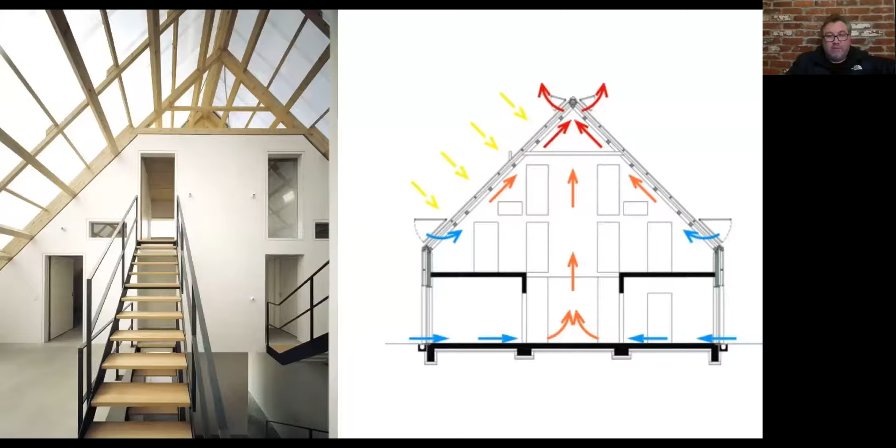Where does it make sense? Where does it not make sense? This was really early in our explorations on mass timber, so there are things in this that I definitely would not do today. But at the time, here on the West Coast, there weren't many people trying to do things like this. And so we were really trying to foment this discussion, not just hoping that we would get a project in Italy, but also locally.

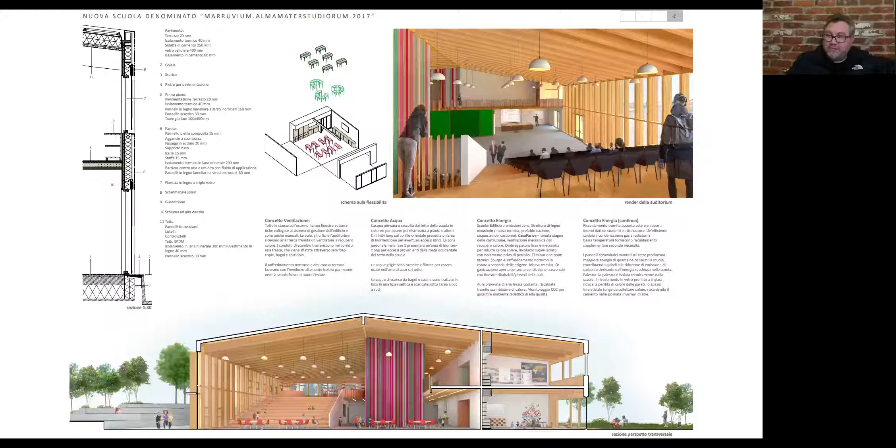We've been trying to push prefabrication, passive house, mass timber for quite a number of years. We unfortunately did not place in this competition, but it opened up a wider realm of mass timber for us.

Continuing on to a couple of speculative projects that we've undertaken. This is a 6-story building in a commercial district in Seattle. Really simple framework, CLT floors, a super high performance facade, and coming up with these really compact templates that we could potentially use on other projects. We've since taken this concept, and the 5,000 square meter primary school that we're working on is similar to this, but it's only 2 stories.

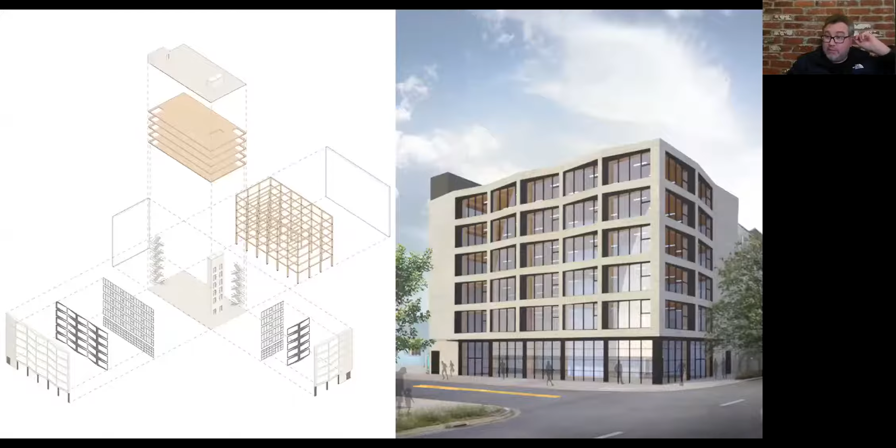And then the year before I moved to Germany, like I said, I got an opportunity to work in Brettstapel again. So this is the boards that are all ganged together in a row. There wasn't an American firm that was doing this. There was a firm in British Columbia, Canada, which, if you know Vorarlberg, British Columbia has become the North American version of Vorarlberg.

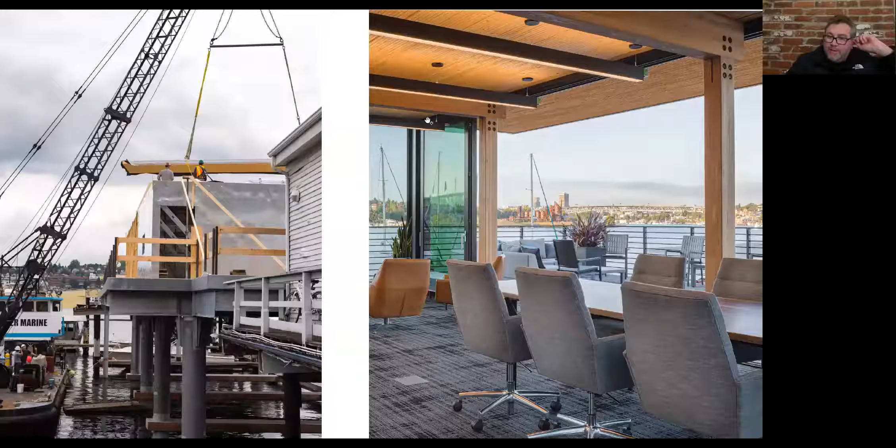There are a number of mass timber fabricators, manufacturers. We can get CLT now. We can get really nice glulam stock, really good, really elegant dowel laminated timber panels as well, like this one. And so there was a marina. This is an office over a lake that burned down a couple of years ago, and the client was basically told by the city that they needed to replace it as soon as possible.

So we built this huge steel and concrete platform that you can see right here, but we wanted to do something a little bit different for the roof. And we actually looked at doing cross-laminated timber panels. We have these overhangs, and the CLT actually performed better on the overhangs. But at the time, there was really only one CLT manufacturer in North America on the West Coast, and they were extremely busy. So the price was really high and the lead time was really long.

We talked to this firm that was making the dowel laminated timber panels, StructureCraft, who are doing really amazing, innovative work. They're big fans of Grasshopper and Rhino, and using all of these processes to optimize not just the way that they're fabricating things, but also the way that they're designing, and it's super elegant. So they worked with us. Again, it's over the water.

The only way to install these panels, which were about 3 meters wide by, let's say, 15, 16 meters long, was to load them up on a barge that had a crane, pick them up off the barge from the water, and put them on the building. So it was a little bit of a disconcerting experience. It was really everybody's first time doing anything like this, but it went together super fast. We got the roof on in a day.

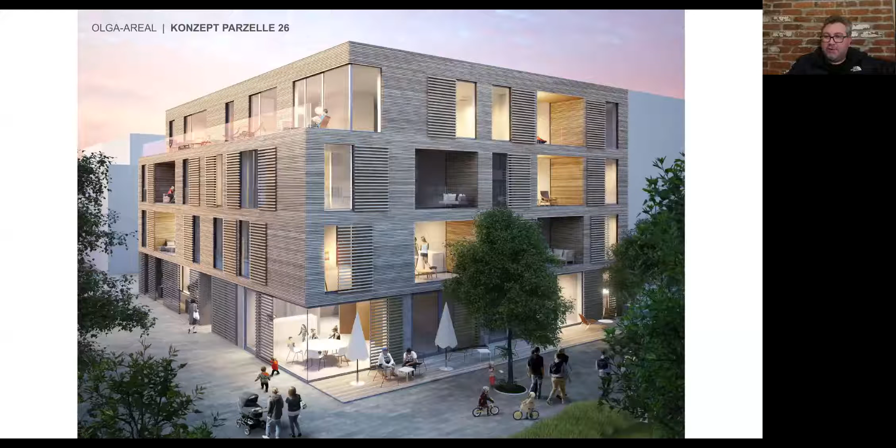It's modern, it's clean. The windows are all kind of similar size, right? So I think it looks good as an architect, and then it's also, I think, simpler to do as a passive house as well. And so a little bit of background on this project.

It's 11 homes. 2 of them are barrier-free. The units range quite a bit in size, from 61 to 115 square meters. So I believe it's 1 bedrooms all the way up to 4. It doesn't have a ton of community space, but it has a little bit. There's a small courtyard in the rear. And then there's a community space by the entry, and it has a little kitchen, kind of a coffee counter, essentially.

The wood fabricator for the project was Holzius. They're based in Germany. They have this really interesting mass timber product, a little bit like dowel laminated timber, but with big solid members that are kind of ganged together. And they don't use glues, they don't use metal in the individual panels; they use metal screws when they fasten them together. And it has a really wonderful aesthetic.

So the mass timber elements in the project, like I said, there's the floors. It's the HBV, the Holzbeton Verbund, the concrete wood hybrid. And we've seen that in a lot of projects. We're doing a lot of things in that nature here as well. The concrete is really more for dampening the sound than anything else. And then it's also in the walls. So the walls have this wood material as well, with exterior insulation beyond that.

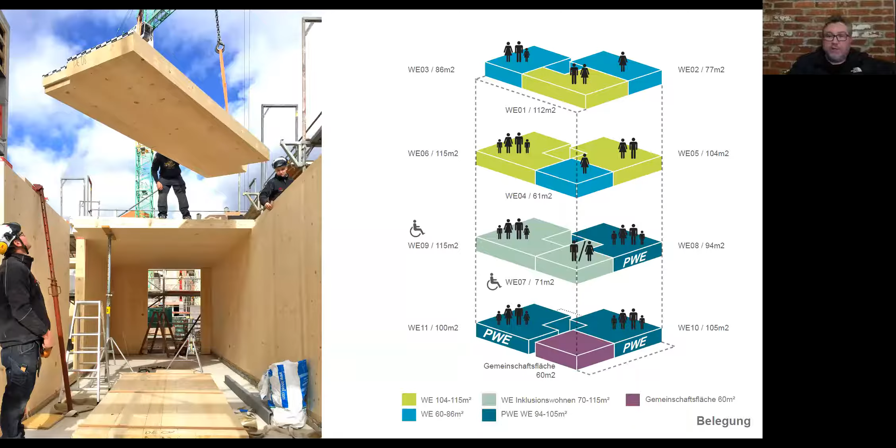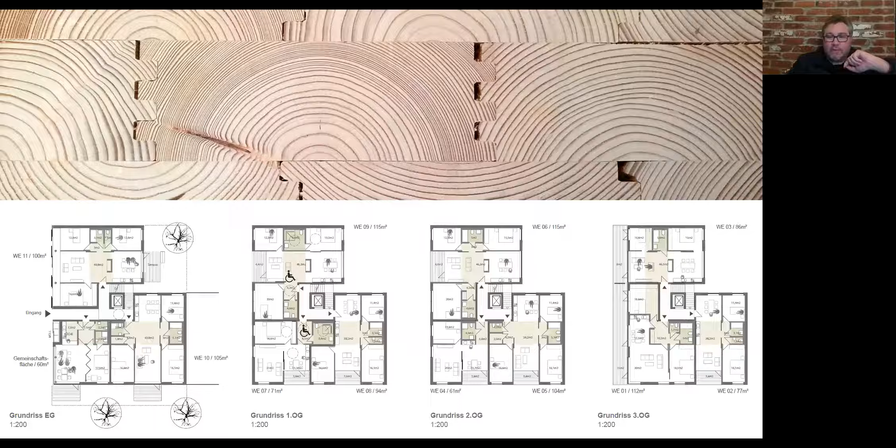So we'll move on to another project, Dreiecksgrün. This is in Berlin by Roedig Schop architects, who have done a number of really stunning mass timber projects. They've also done a number of really amazing Baugruppen. And so some of you are probably quite familiar with some of their projects. Also on it were Atelier PK and Rozynski Sturm, who also have some really, really elegant projects.

I love this building. It blends in well with the surroundings, I think. I love it because it's also on a quieter street. In most American cities, you can't build large buildings like this on a quiet street. They're usually on very loud and busy arterials or highways. And I also like the breadth of the building, right? So all of our lots in the US tend to be very narrow, and this is a very wide lot, and I think it allows for some very generously proportioned units as well.

All of the ground floor units on this are maisonettes. I don't know any other term for it other than maisonettes, but they're basically 2-story units within the building. So all of these have the living area on the ground floor, and then generally bedrooms up above. 13 units, 7 of them are flats. They're on the upper floors, the 6 maisonettes, like I said, that has a community roof deck. Actually, this one does not have a guest suite. And it has a very large shared courtyard. All of the units on the front side open up to the street. And on the back side, they have deeper balconies for private exterior space as well.

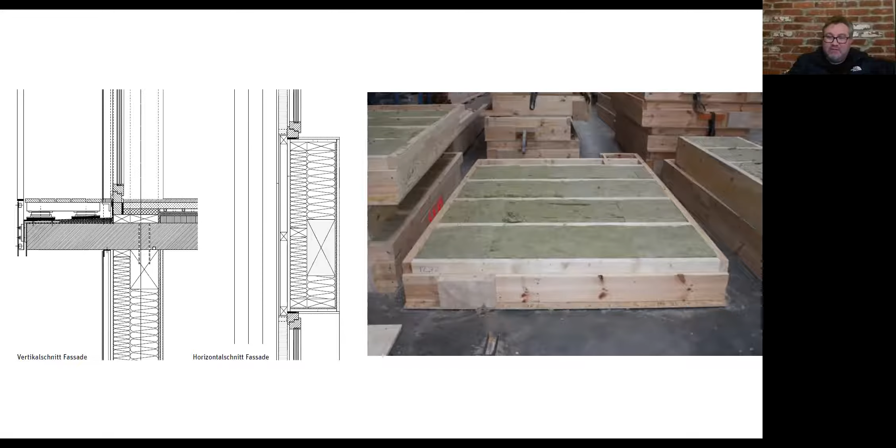From a passive house standpoint, I look at this detail and I kind of cringe a little bit. The CLT panels on the floor actually protrude out into the exterior environment. So there's a little bit of a thermal bridge here. It's wood, so it's better than concrete, but it's not ideal from a passive house standpoint. And I wanted to show this because this is a big issue for us on a number of projects where people want to keep the mass timber floor continuous through the external envelope.

And it's really difficult to have that conversation where we convince them that it may look great, it may perform fine over time, but if we're trying to achieve something as efficient as passive house, it's definitely not ideal. And also wrapping it with insulation also isn't necessarily ideal. Our solution is generally to go with thermal break and then have columns, and the structure for the balcony is kind of all vertically carried on the exterior.

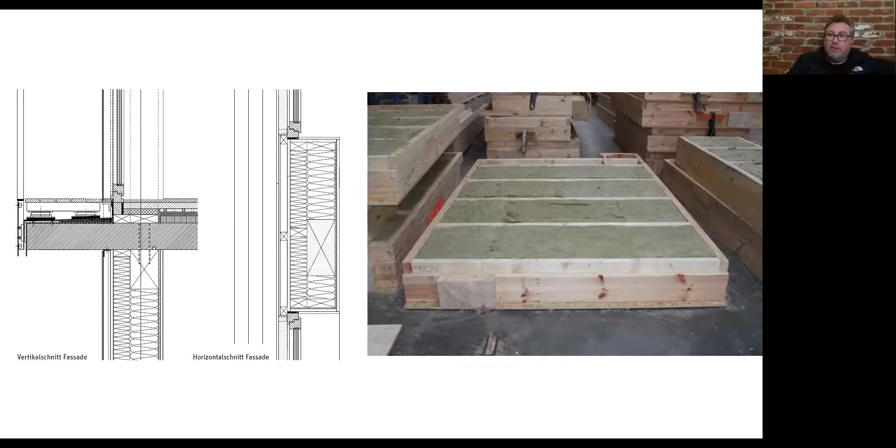Again, picture of the building under construction. You can start to see the wood columns and beams kind of forming the structure of this. Again, here's the concrete core for the circulation, and they're starting to install the panels. The section, this is kind of a classic. I love all of the Berlin Grundriss buildings. 22 meters to the Traufe, and then you've got your 45-degree Dachwinkel roof angle that it springs off of. It's very, very common.

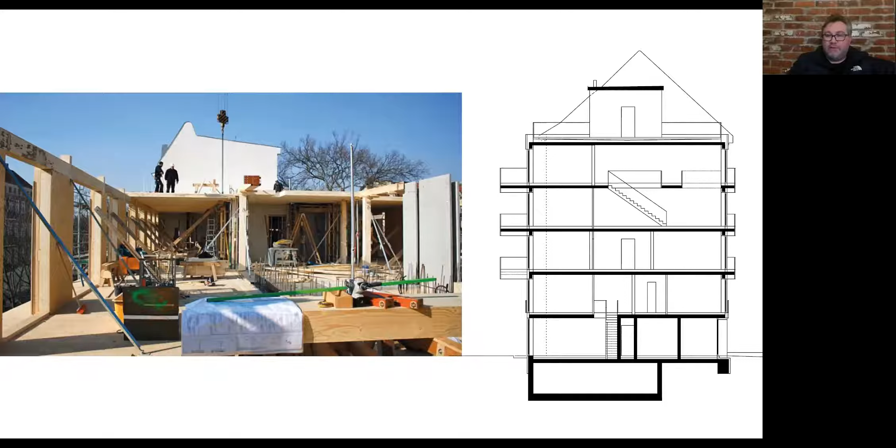Just run through the floor plans real quick. So coming in off of the street, there's a couple of units that have access off of the street, their own front door. This is the common entrance. It's kind of a little community space with a restroom, and then it has two means of egress going up to the top floor. So like I said, all of the units on the ground floor and the first floor are maisonettes. So this is the upper floor for this unit, and so on. From floors 2 through 4, these are all stacked flats. I believe they're all accessible as well, barrier-free.

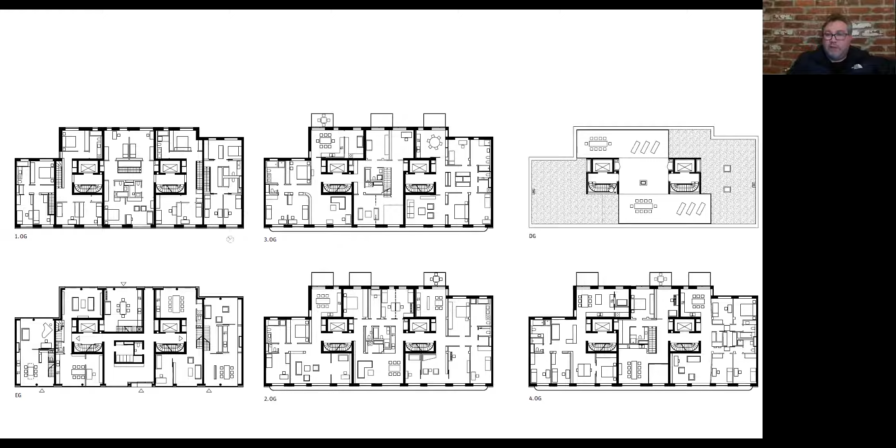It's a big topic in a lot of our buildings right now, is how do we retrofit existing buildings that weren't designed to be accessible and inclusive. And so we try to start with that mindset so that retrofitting elevators and low barrier thresholds isn't something we need to worry about. And then this is again the roof terrace with the two means of egress. It's fairly simple.

The last project I'll show is Walden 48. Walden 48 is also in Berlin. It's a much larger project that wrapped up, I want to say last year. It's by Scharabi Architekten, who were collaborating with Raupach Architekten. Scharabi have done a lot of really well done mass timber projects in Berlin over the last couple of years. I think you'll recognize this project, and you'll also recognize a lot more.

Set the context, this is Landsberger Allee, very loud road, actually one of the loudest streets in the city. It also has, I think, the S-Bahn running down the middle. The site sits next to an old cemetery, and then there's this old cemetery wall that was required to remain for the project. And so the building is kind of set within these two worlds, this weird duality of the loud streets and the quieter courtyard with the cemetery. There's a lot of greenery visible, and the building really reflects that duality. So it's kind of this boring street face for the loud front, and then it opens up on the backside.

So it's in Friedrichshain in Berlin, 41 homes. There's also a small business with space for a couple of desks or co-working stations. Similar to the previous project, the ground floor units are all maisonettes. There's a communal roof deck. There's a large community room. There's also a very large shared courtyard.

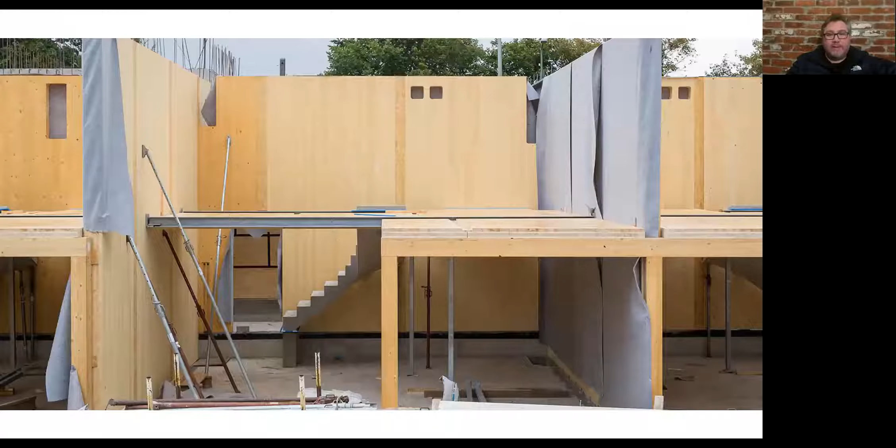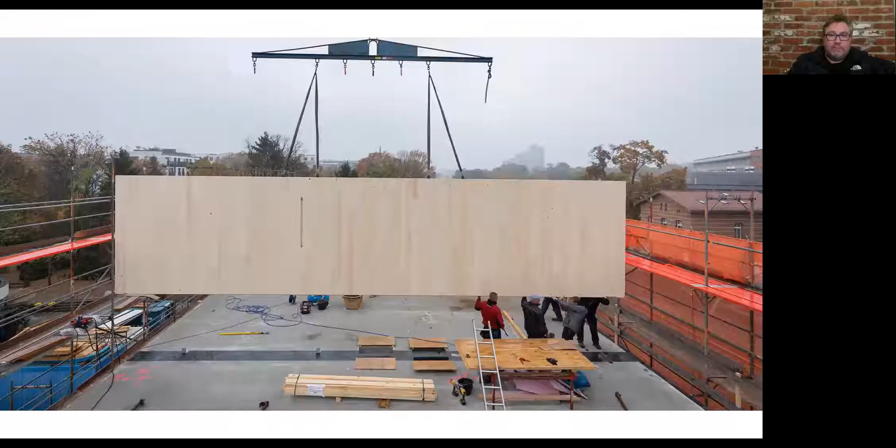So here's the balcony. Again, generous sized balcony. I love that the wood is all continuous. You can start to see the greenery of the cemetery again. Here's some of the maisonette units under construction. So you can see columns, beams with the CLT panels set above them. Much larger panel being set.

Another thing that I find really intriguing, having worked in both countries, both Germany and the US, we don't use CLT panels for walls. We almost exclusively use them for floors, and there are only a couple of projects that have used them for walls. The big reason on the West Coast is because of earthquakes, for seismic reasons. Buildings that are made of wood need to be a little bit flexible. And so there are a couple of issues with all of the walls and floors being wood. The building actually might not flex enough.

So on the West Coast, it's pretty rare to see these buildings. On the East Coast, New York, Toronto, they've kind of started; Toronto especially has become a kind of mass timber hub where I've seen a lot more wall panels. But then in Germany, it's almost exclusively, I would say, CLT wall panels when they're in a project. I've seen a ton of projects that have CLT wall panels, but they don't even have them for floor panels. So it's a little bit of an inversion, which again, it's just the weirdness of how we work, I guess, and the context of how we have to work as well.

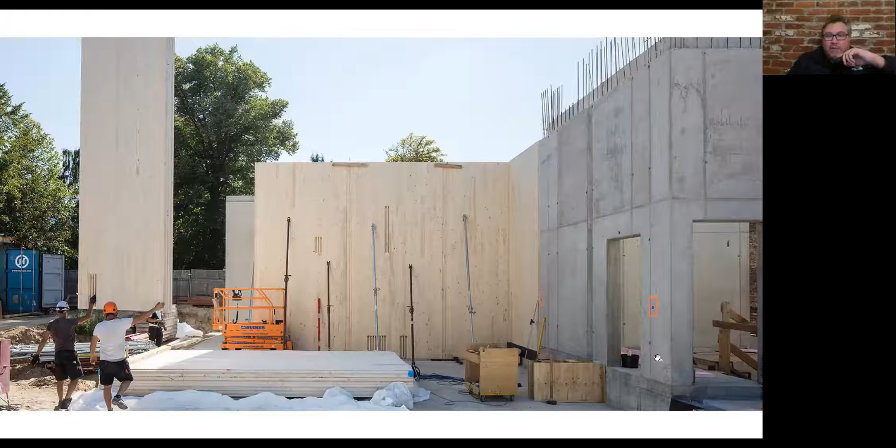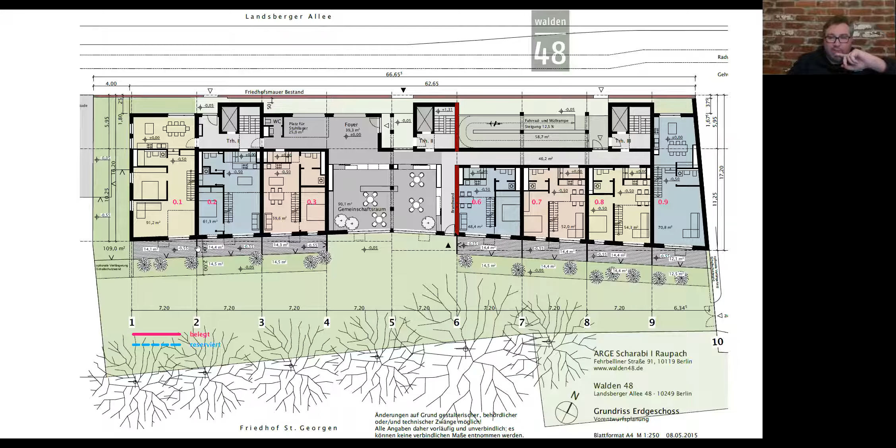And then all of the upper units are basically just stacked flats. And again, they vary quite widely in size, from one bedroom to four. We really just don't see this variability in the US. And that's one of the things that I hope to be changing here in the near future.

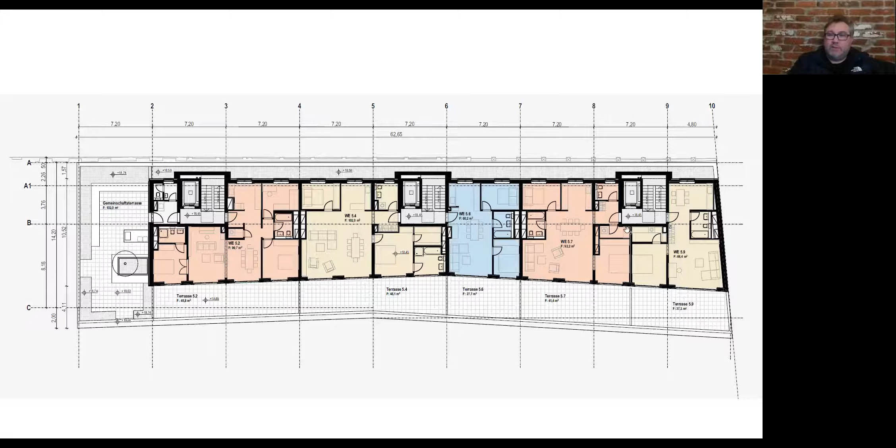And then here's the rooftop. So here's a little coffee kitchenette, restroom, storage, and then the community roof deck. And then again, these are all individual units, three stairwells serving those throughout the building. And then these guys have a much larger roof terrace.

And then again, back to the section of the building, maisonette. Here's our cemetery, our wonderful little underground bike parking. These are the stacked flats, and then the roof terrace. Again, the 22-meter Traufe. I don't know if there's a translation in English for that. And then our roof.

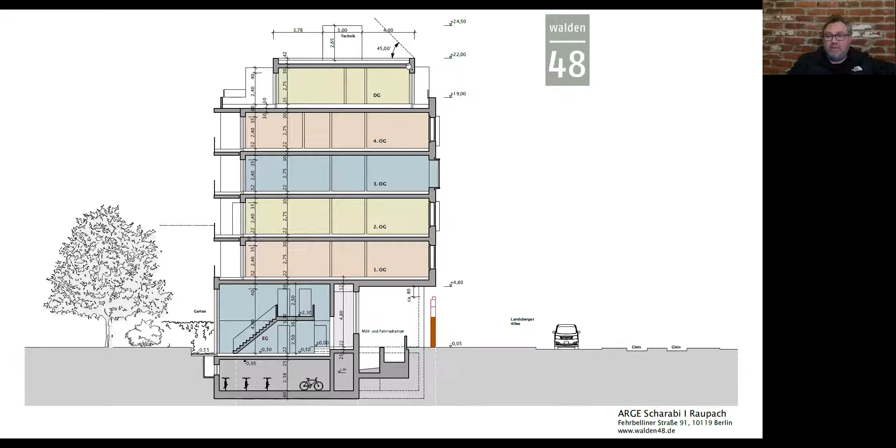Which brings me to the project that we're working on. I don't actually have that much to show on this right now because it's mostly calculation. So about 7 years ago, we started down the track of trying to get a big group of people that we knew were interested in doing a Baugruppe to sit down with us and figure out how we would do it. A lot of the European projects have the capability to do a project slowly. The cities support them, their access to financing is easier, the entitlement process isn't as difficult.

Here in Seattle, projects have to move very fast. The development scene here is still really, really hot, even with coronavirus. If land comes up for sale, it gets bought almost immediately. And so we really didn't have the capability to come up with the money, because the cost of land is so high, to buy land and then to hold that land, develop the project, get our entitlements, and then construct it. And even if we decided to go the mass timber route and have a much shorter construction duration, it just wasn't going to be feasible.

So we spent a couple of years trying to figure out how to do that and realized that it wasn't going to happen, and so we left. And then I went to Germany, and then Germany didn't work out. So I came back here. And my good friend Aaron Yankauskas, who I used to be in business with, we put our heads together.

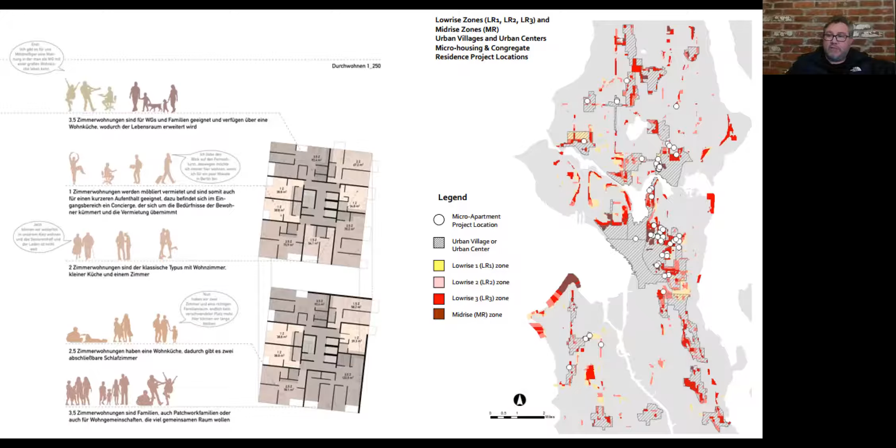And also I want to have a project that's a little bit larger. I want to have this community that we grow up together. Our kids grow up together, and then we grow old together. So, like I said, this is what a lot of Seattle looks like, where we only limit multifamily housing to these louder arterial roads, and then everything off of it is quiet detached houses.

These are the books that, as an architect, as a Baugruppe, as someone who has been obsessed with social housing and community-led housing for most of my career, have been really eye-opening for me. The first one, Kristien Ring's Self-Made City, features a number of Baugruppen interviews and conversations. It's a really great book.

Co-Housing Inclusive was written by Michael LaFond, who lives in Berlin. He's with ID22. Michael was one of the initiators of the... it's not Spreewald. There's a big cooperative on the Spree in Berlin with a bunch of really innovative unit layouts, the cluster Wohnungen, the cluster apartments, and he's affiliated with that project. He wrote Co-Housing Inclusive, and again, it's a number of projects, essays, diagrams, topics on funding and financing, land procurement. That was also really good.

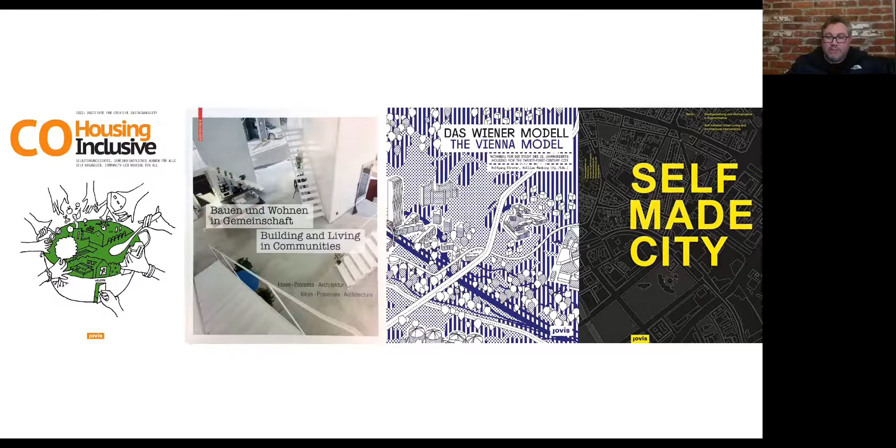So our hope is that in the next couple of months, we'll have finalized our business plan, gotten sign-off from the bank, and started down our process of semi-collectively designing some very nice, somewhat affordable urban mass timber co-housing. And that's all I have.